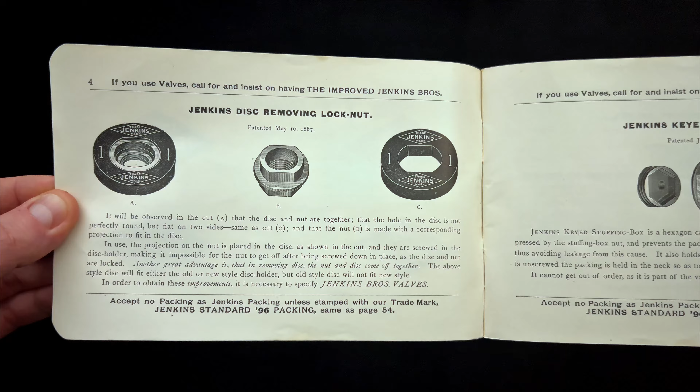They weren't just selling brass, they were selling a guarantee against disaster. In this vintage catalog, we will uncover their 3 engineering secrets: their patented disc, their keyed stuffing box, and their ingenious repair method that allowed one small company to solve the most dangerous, costly, and complex problem of the industrial age. We'll show you the competitor failures this valve was designed to replace, the absurd cost savings it created for factory owners, and why this century-old design is still considered a masterclass in reliable engineering today.

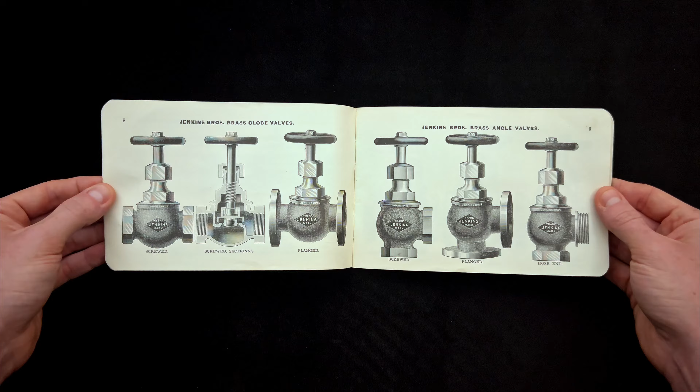At the beginning of this 1899 catalog, Jenkins states a guarantee so aggressive, so absolute, no other company in the world would dare print it, which they refer to as their fair offer.

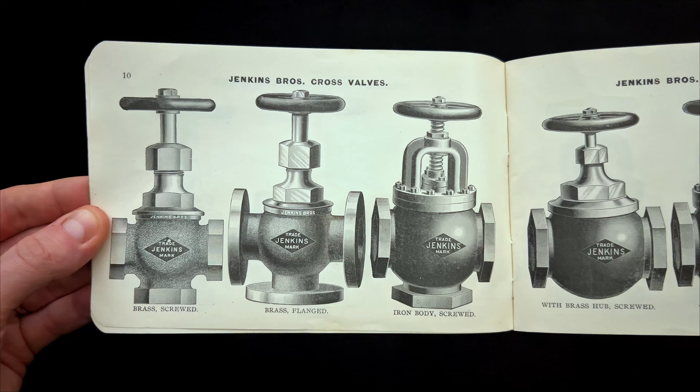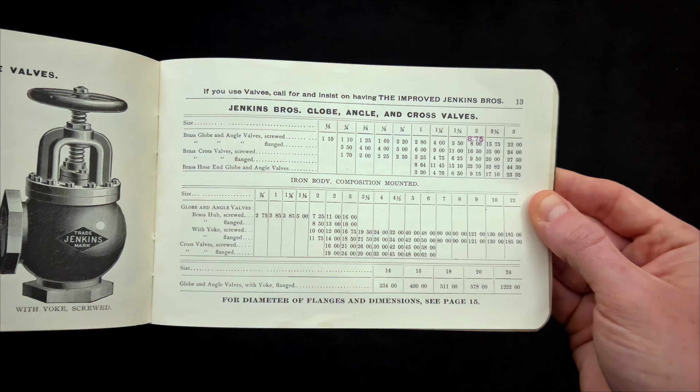It says, if you will put a Jenkins Bros valve on the worst place you can find, where you cannot keep other valves tight, and if it is not perfectly tight or does not hold steam, oils, acids, water, or other fluids longer than any other valve, you may return it and your money will be refunded.

They were saying, find the most dangerous, high-pressure, corrosive, acidic, leaky pipe you can find on this planet, and our valve will not fail. That kind of confidence wasn't built on wishful thinking. It was built on a tiny, revolutionary invention that literally prevented the explosions their competitors' inferior valves were causing.

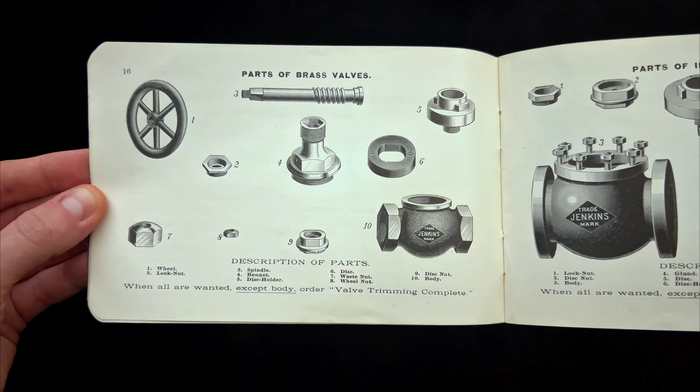To understand the revolution, you have to understand the crisis. Before Jenkins, valves used a simple, awful system: metal ground against metal. This was called a ground joint, or metal-seated valve.

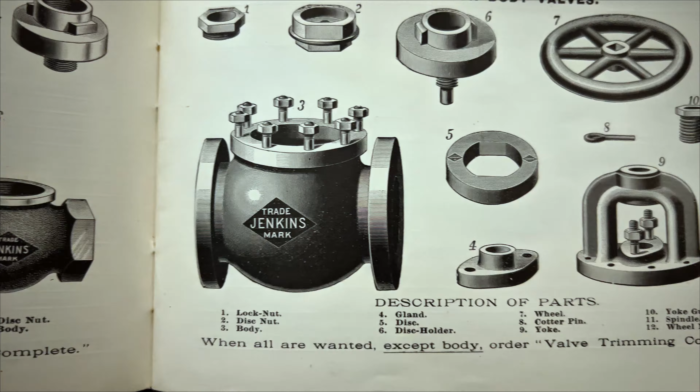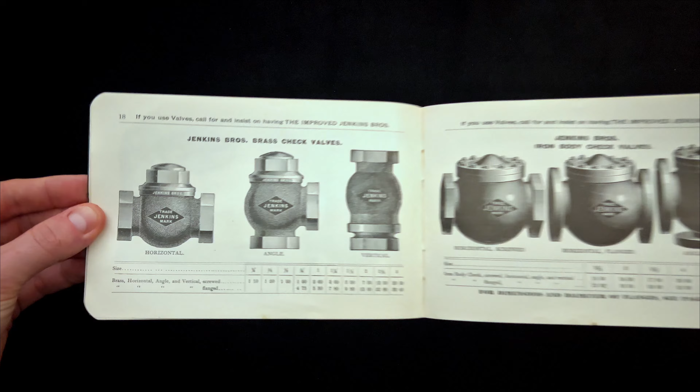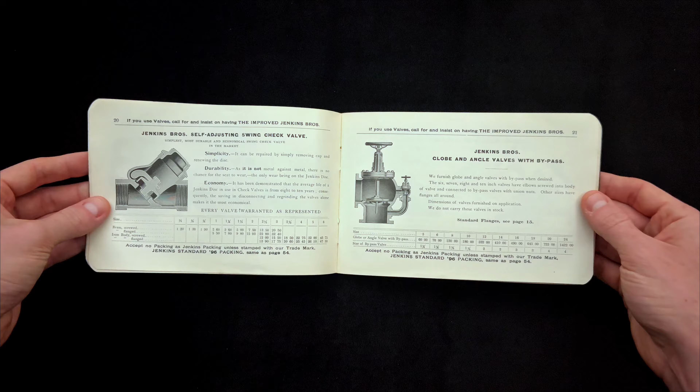High-pressure steam and industrial fluids are brutal environments. The metal expands and contracts wildly under heat. The constant pressure and vibration cause the rigid metal seat to rapidly pit, erode, and grind itself into a sieve. This was a process called wire drawing, and it meant a valve was failing constantly.

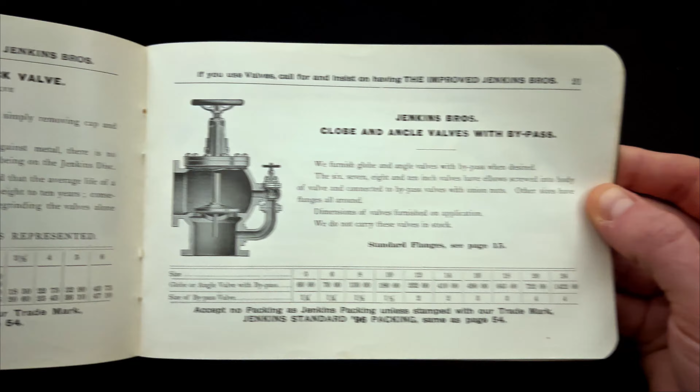The result was a continuous stream of leaks, which translated directly into vast sums of wasted steam and wasted money for the factory owner. But for the plumber, the cost was measured in labor and danger.

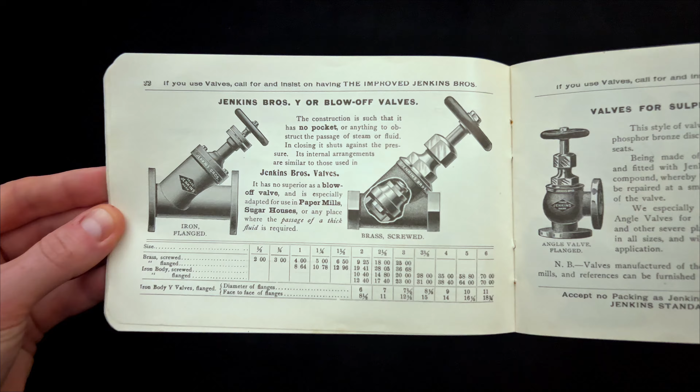A constant drip meant an engineer was constantly having to regrind the metal seat by hand. The steam line would have to be shut down, cooled, disassembled, and hand-lapped back into a seal. This was expensive, unreliable, and prone to error.

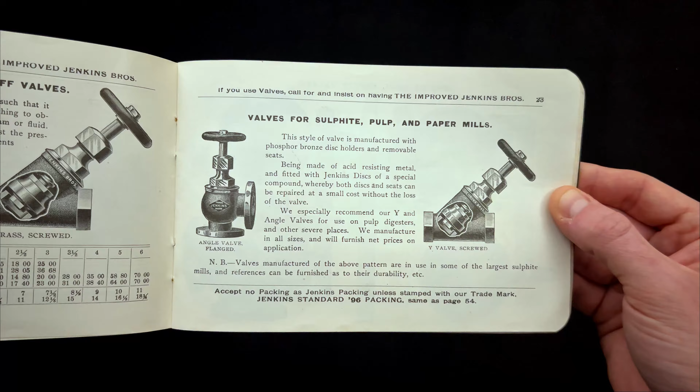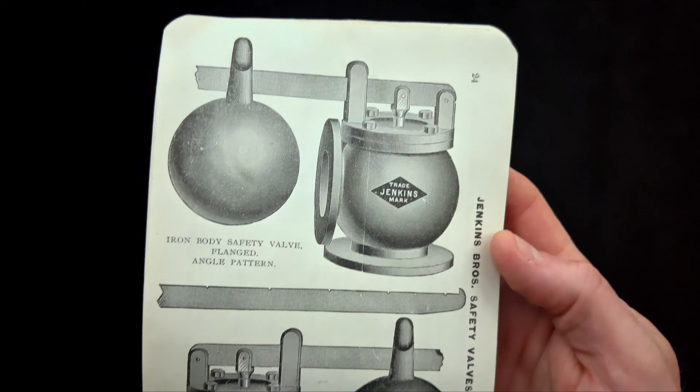More importantly, those chronic high-pressure leaks led to rapid, unstable pressure drops in the boiler system. Any disruption to the boiler's pressure could lead to overheating and, ultimately, a catastrophic structural failure of the boiler itself, the precursor to an explosion.

Every plumber knew that a leaking valve was not just an inconvenience, it was a silent threat. The industry desperately needed a seal that could adapt to imperfect surfaces, withstand high heat and pressure cycles, and most critically, be easily replaced. The industry needed something flexible.

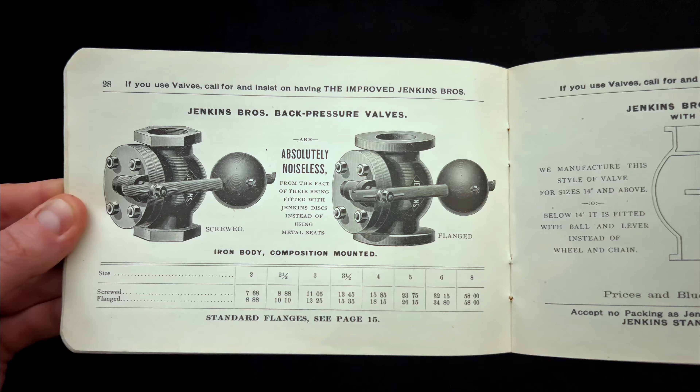The simple, genius solution came from Nathaniel Jenkins, who patented his design back in 1864. But by the 1890s, Jenkins had perfected it. They didn't invent the valve, they invented the valve that actually worked under pressure.

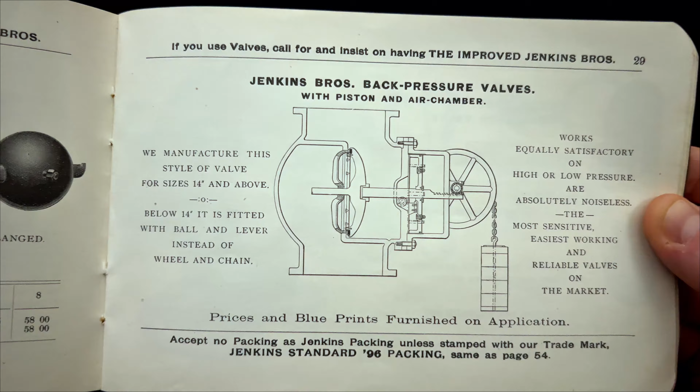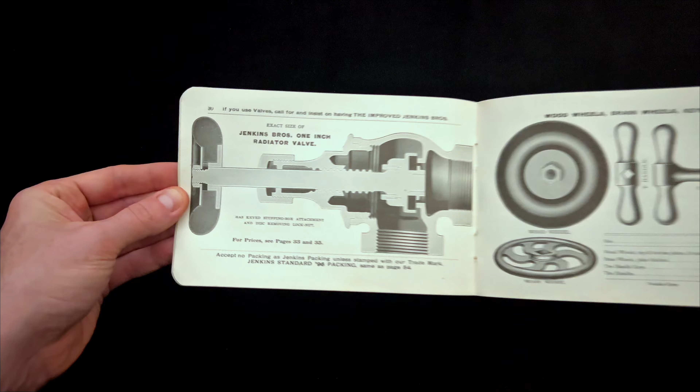The secret was replacing that rigid, failure-prone metal seat with a compressible, replaceable disc made of vulcanized rubber or a proprietary composite they called the Jenkins Standard 96 packing. This disc was the true lifesaver.

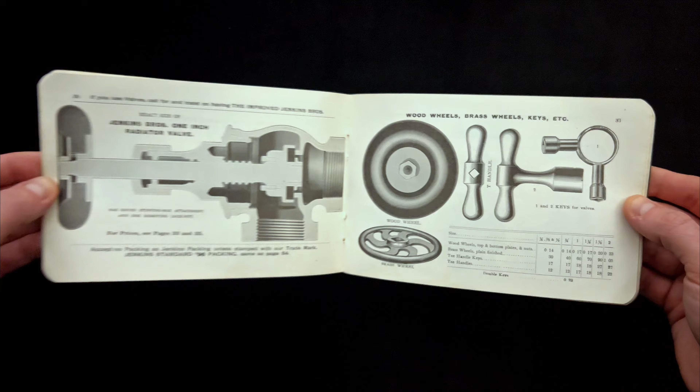The catalog tells you exactly why on page 6 under the heading, Reasons Why They Are Superior. The first reason listed is, the disc forms the seat making a perfectly tight valve under any and all pressures of steam.

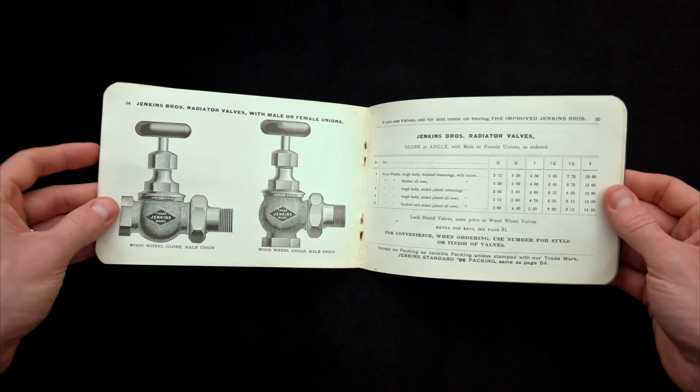Furthermore, they guaranteed that the elasticity of the disc allows it to adapt itself to an imperfect surface. Grit, sand, and tiny imperfections from wear that instantly crippled a metal valve simply didn't matter to the Jenkins disc. It compressed, it absorbed, and it sealed. This was the difference between an unreliable seal and a guarantee against explosion.

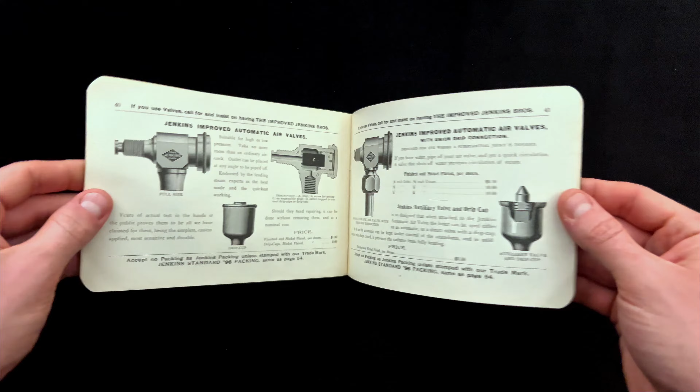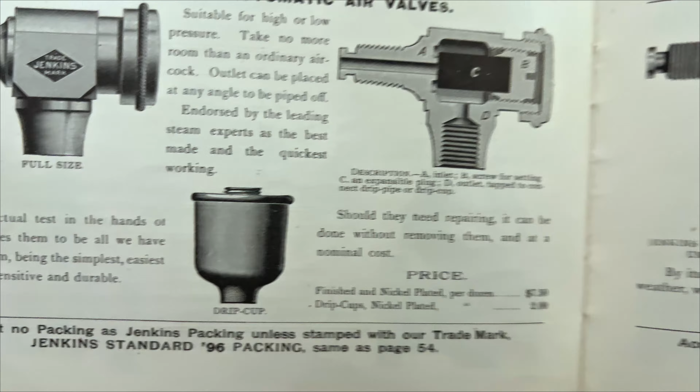The Jenkins discs had been greatly improved, as they state on page 3, specifically engineered to stand high-pressure steam, and are superior to anything ever placed on sale in this line. This wasn't just about steam either. Remember their fair offer? It guaranteed their valves would hold steam, oils, acids, water, or other fluids, proving the composite disc was engineered to resist chemical corrosion and heat breakdown in a way metal could not.

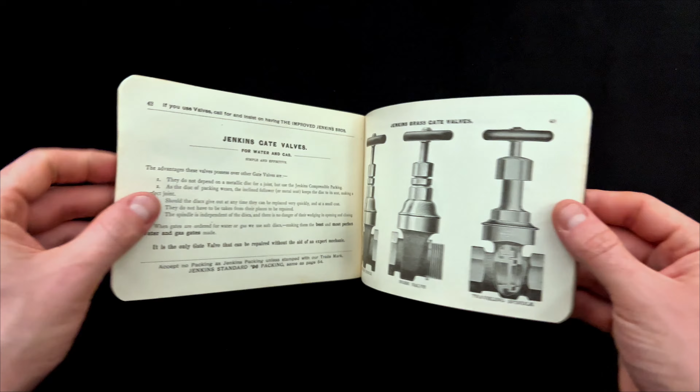And the cost of this life-saving innovation? The material for the replacement discs was listed for as little as $1 per pound on page 30. A cheap, quick fix that saved countless thousands in repairs and averted certain disaster.

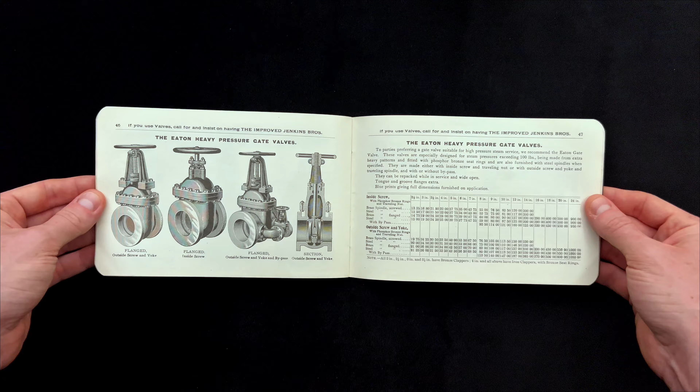But Jenkins knew a great disc wasn't enough. The surrounding mechanism had to be equally brilliant to make the valve last. The catalog is a testament to the fact that they obsessed over every tiny detail. For example, they improved their iron body valves by increasing the thickness of flanges and adding more bolts, making them suitable for either high or low steam pressure. This solved the problem of pressure warping the iron body itself. They were building redundancy into the very structure of the valve.

They pioneered the keyed stuffing box. This patented feature, detailed on page 5, prevented the packing and nut from turning when you opened or closed the valve, stopping a common cause of leaks right at the stem. This small adjustment significantly extended the life of the critical sealing material.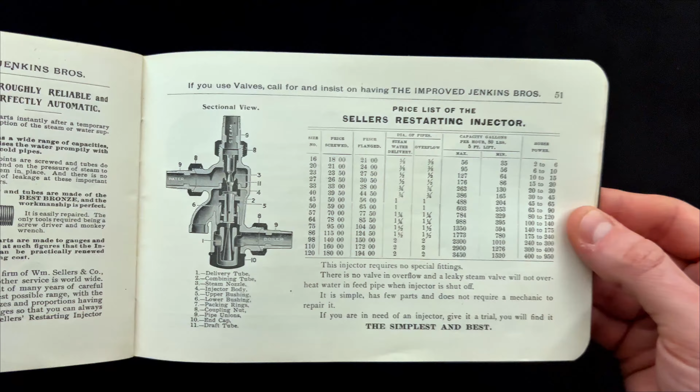But the true quality of life improvement was for the plumber on the job. The catalog guarantees you do not have to take them off to repair them, and they can be repaired by any mechanic in a few minutes. This promise meant the plumber could swap a new disc into a running line, minimizing downtime and saving the factory owner money. How did they achieve this speed?

But because their technology was so superior and so critical for safety, Jenkins faced a huge problem: counterfeiting. The competition couldn't match the quality, so they resorted to lying. The Jenkins story is a perfect example of a superior technology conquering a dangerous market, but that dominance had to be defended.

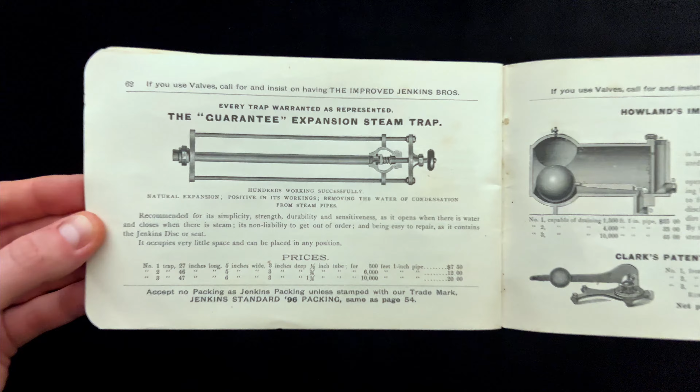Look closely at page 62. They repeatedly print a severe, stern warning: do not accept any valves as ours unless stamped with trademark. They had to spend money on their catalog and marketing just to fight the endless stream of cheap, dangerous knockoffs.

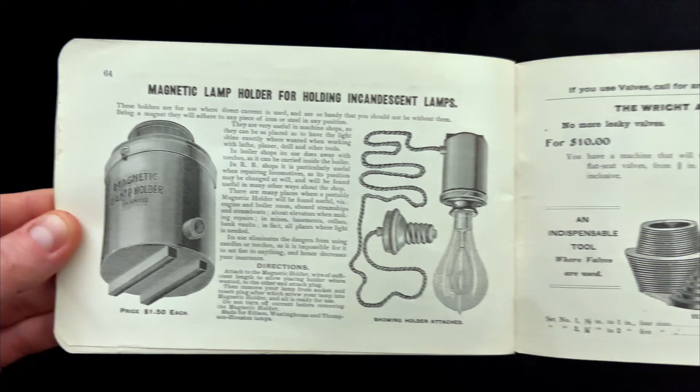This trademark, the diamond mark, wasn't a vanity stamp. It was a safety certification. When an engineer saw the trademark, they knew they were looking at the valve that would not fail, the one that guaranteed safety, not a cheap imitation that would inevitably turn the boiler room into another time bomb.

By 1899, the company had established major distribution hubs not just in New York, but in Boston, Philadelphia, and Chicago. They were supplying the new industrial backbone of America, from the steam lines of the Brooklyn Bridge to the plumbing of the latest skyscrapers. Today, the Jenkins name is still synonymous with quality, having been acquired and expanded over a century later.